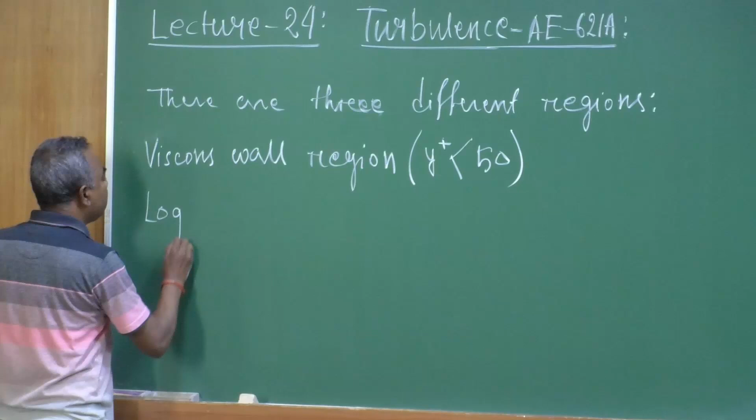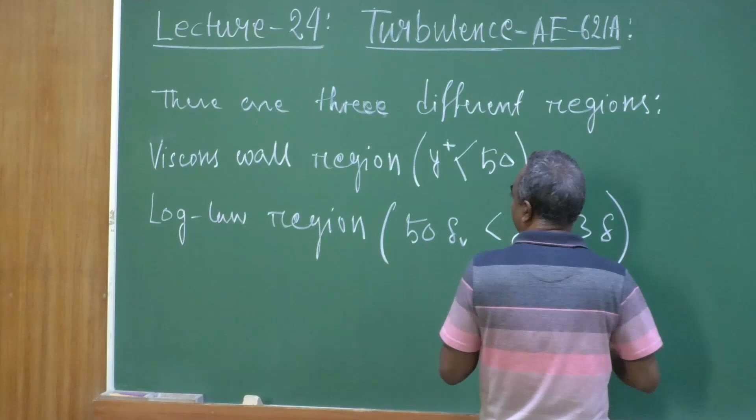Then our log law region, found to be within 50 to 0.3 delta in wall units, where this log law is found to be well valid. That is another regime. The last one is the core regime, or core region, for y greater than 0.3 delta. So that is the 3 regimes.

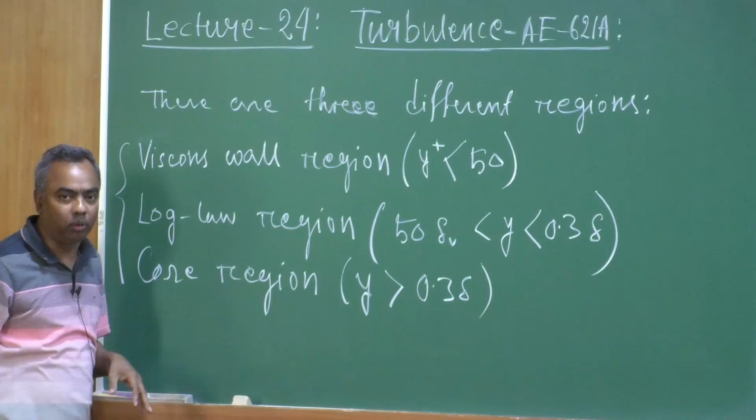In these 3 regimes we will have variations, meaning how these turbulent statistics vary, that is what we are going to talk about now.

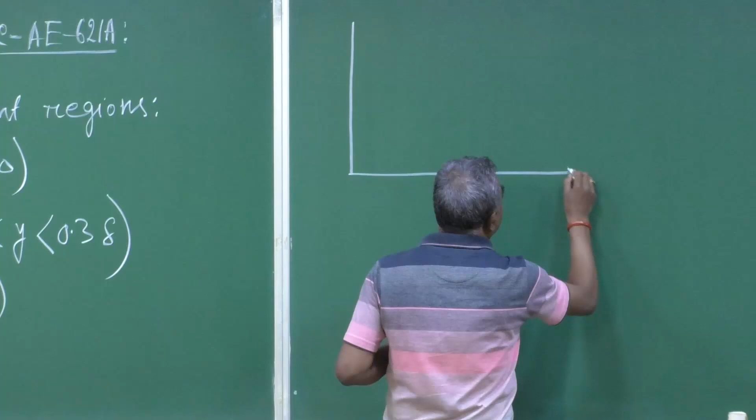Let us see the turbulent statistics plot in turbulent channel flow. These plots, as I mentioned, I will draw mainly following the book by Pope, and for details please go to that book and read for better understanding as well as for the exact values of this variation of turbulent statistics.

Let us say this axis is y, and this scale is ui uj bar by u tau square, that is Reynolds stresses normalized by friction velocity squared. So this is 8, let us say this is 4, this is 7, this is 2, this is 1, this is 0, and this is minus 1.

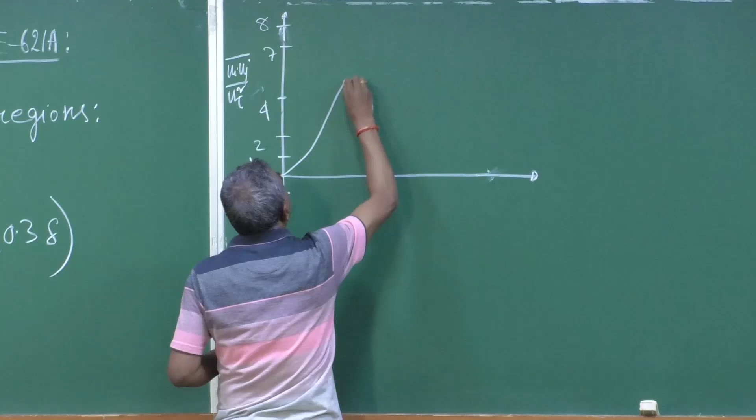Let us see the variation of various Reynolds stresses. For example, Reynolds normal stress u, I am drawing this very close to the wall only, so let us say this axis is y plus.

Till y plus 60, it is sort of blown up in the near wall area. So this is let us say 20 and this is 40 - actually this should be even more blown up because the maxima is somewhere close to 12, so 20 should be somewhere here and this should be 40. We are focusing mainly near the wall here, on how these Reynolds stresses vary.

So this quantity, let me use this color - this one is u RMS squared, that means u square bar. So this is what this quantity represents.

If you see the turbulent kinetic energy, that will also come out something similar - this one is essentially K. K is nothing but half ui ui bar, that is turbulent kinetic energy by definition. So this is what K is.

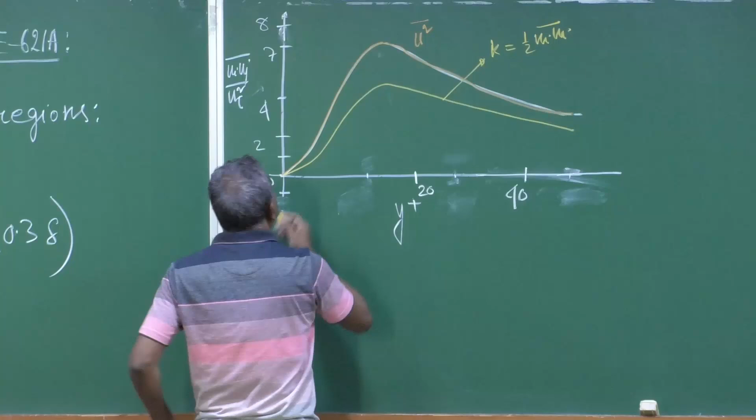Then let us show another 3 quantities, which are W square bar, and V.

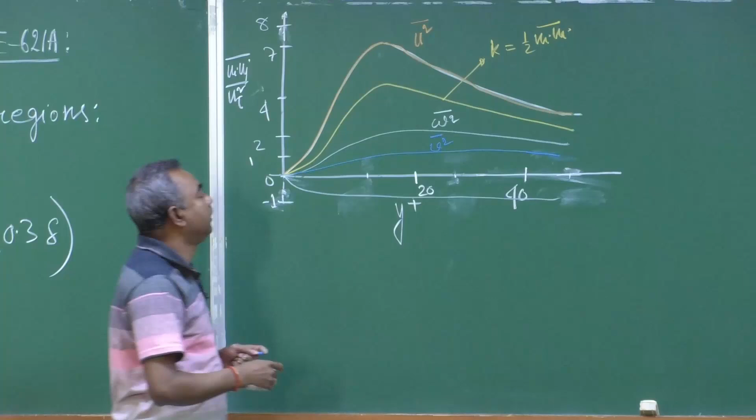So, this is V square bar, okay, and Reynolds stress will vary something like this, so one should be somewhere here. So, that is what your Reynolds stress. Very near the wall you see how these stresses are varying, when this normalization is done by u tau square.

So, this is URMS square, WRMS square, VRMS square, this is what is Reynolds stress. This is UV bar, and this is negative, so that means minus UV is positive, keep it in mind. So, this is the variation of these Reynolds stresses very close to the wall, if you see, they will look like that.

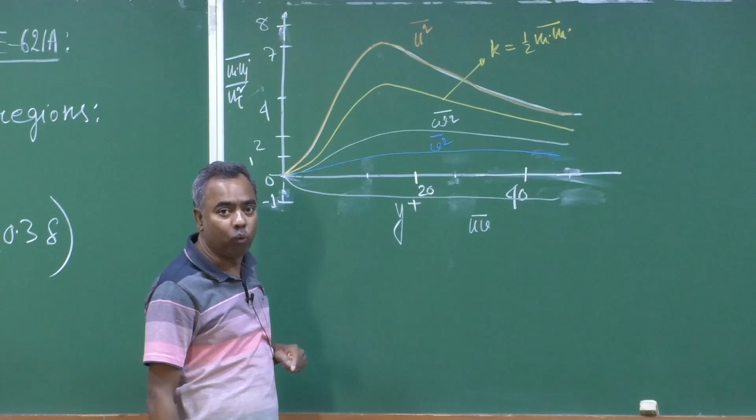Now, let us plot the same thing. Why I have blown it up here is because close to the wall, in the viscous wall region, vigorous turbulence activities are there, because this URMS square is giving a peak here, then similarly WRMS, all the peaks are within y plus less than 50, that is within this viscous wall region. So, the vigorous turbulent activities are going on close to the wall.

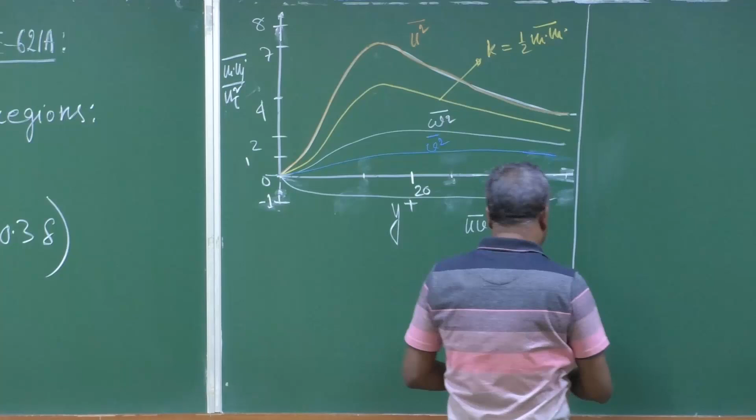All right, now let us draw another plot normalized by the turbulent kinetic energy itself. So, how will it look? Let me draw it here. Similarly, this is y plus, and let us say this is 400, y plus 400. So, that means if this is 100, then this is 200, this is 300.

100, 200 and this is 300, y plus, all right. And this one, let us say it is about 2. And what is this axis? We have normalized this ui uj bar divided by the turbulent kinetic energy equation, divided by this k. And this is let us say 2, this is 1 and this is 0.5. And let us say this is 1 and this is about 1.5.

So, if we now plot this variation, then it will look like this. It will slowly try to come to 0 close to the center line of the channel.

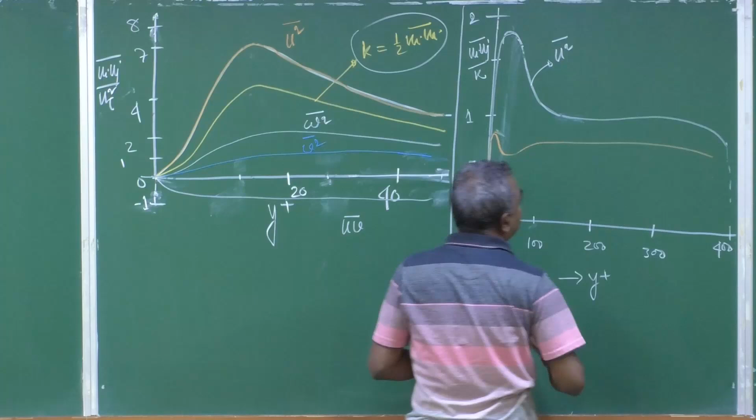This is your W square bar, and your V will be something like this. So, this is your, and if you see, let us say this is minus 0.5, then this Reynolds stress quantity is going to be something like this. So, the main point to show this plot is this particular regime which is the log law regime.

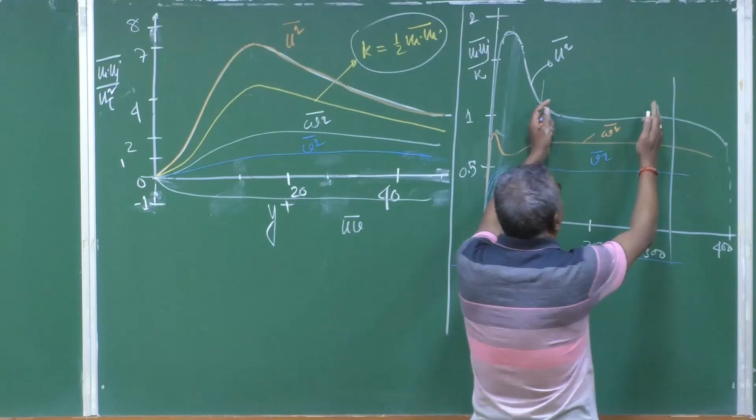So, in this log law regime, these quantities, once normalized by the turbulent kinetic energy equation, are almost self similar, they are uniform in this regime. So, they are approximately self similar in this particular regime, that is what it actually shows. That is the point we would like to make here.

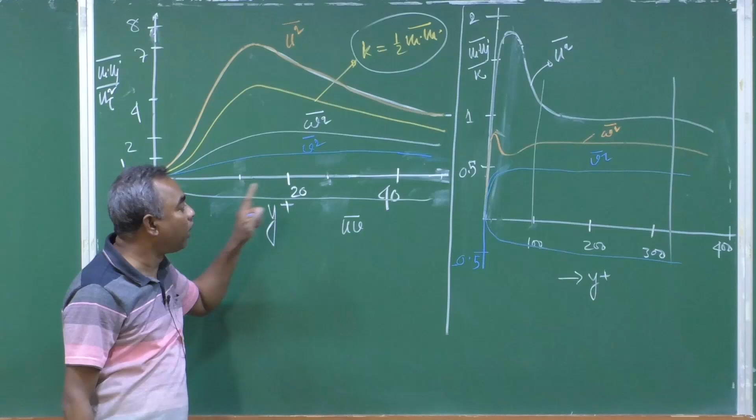The moment you normalize by turbulent kinetic energy equation, whereas in this particular case we see there is a peak value happening close to the wall, which is within the viscous wall region, that is the point. That is the reason we have first divided into 3 regimes: the viscous wall regime, then log law regime, and the core regime.

So, now if we see another plot, let me just plot it here. Note that these are just tentative. If you would like to see the exact plot or values in y and x axis, please go to this book by Pope.

So let us say this axis is 2, 1, 1.5, 0.5, and this is what we are plotting: production P divided by epsilon. So, essentially we are plotting the production term. If we plot the production term, close to the wall it gives a peak, and after that it sort of comes down like this. Similarly, if we plot this, this is production by dissipation.

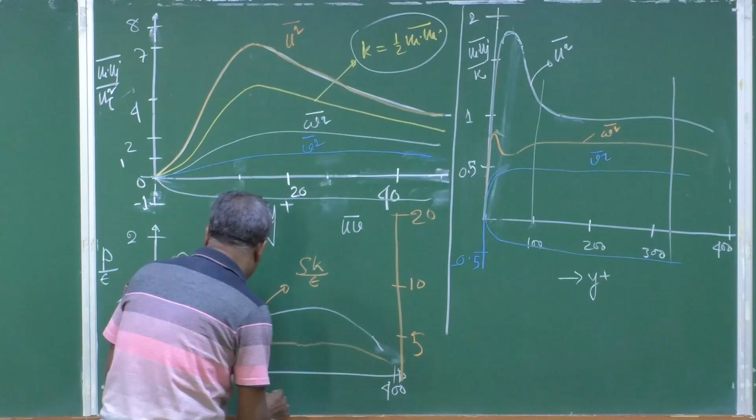And if you plot the shear term, that is also going to come out something similar. But for shear the scale is different, keep that in mind. So this should be 5, and this should be about 20, this should be 10. This is essentially S k by epsilon, where S is du/dy for this case, k is the turbulent kinetic energy, and epsilon is the dissipation.

So you see, very close to the wall, within y plus 50, the production is very high. Later on, in the logarithmic regime, they are sort of constant, and it is kind of close to 1, meaning production is almost equal to dissipation, indicating that transport is negligible in this particular area. Anyway, we will know better as we talk about this.

Turbulent kinetic energy budget: from this we see how these Reynolds stresses vary with respect to y, this being y plus once again. Now, from the boundary condition at the wall we can get some idea about this variation with respect to y. Using the boundary condition at the wall we can somewhat guess the variation with respect to y. How we can do that, let us see.

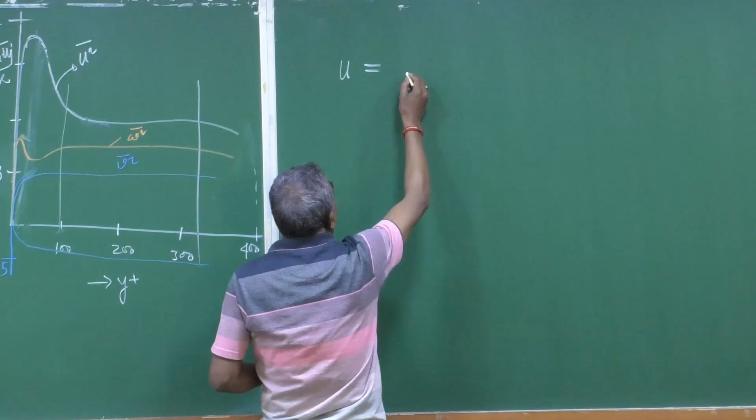At y equal to 0, our velocity is 0. This is the main boundary condition, and using this let us see how we can get this variation. So let us consider the fluctuation u and express this in terms of a Taylor series: a1 plus b1 y plus c1 y squared plus higher order terms. Similarly we can express v as a2 plus b2 y plus c2 y squared plus higher order terms, and w as a3 plus b3 y plus c3 y squared plus higher order terms.

So we can get this variation; very close to the wall, when y is very small, we can express u, v, w by this Taylor series. And A1, B1, C1, A2, B2, C2, A3, B3, C3 are all coefficients.

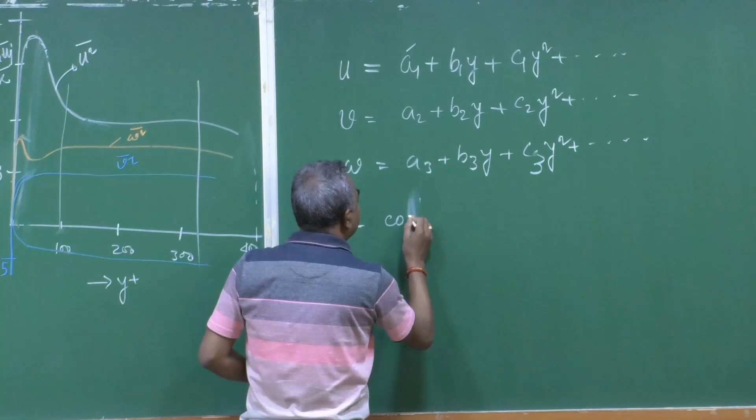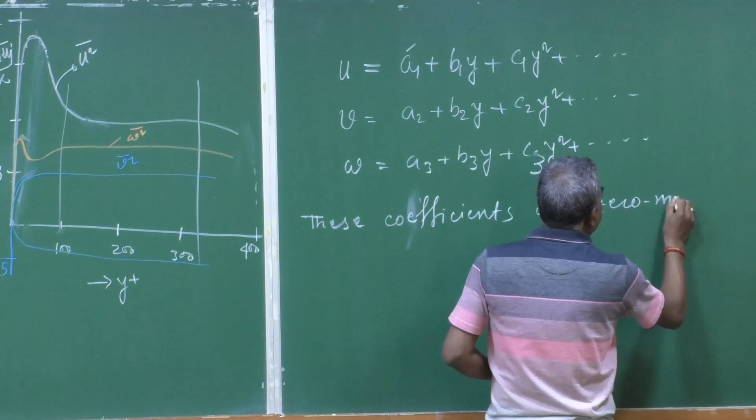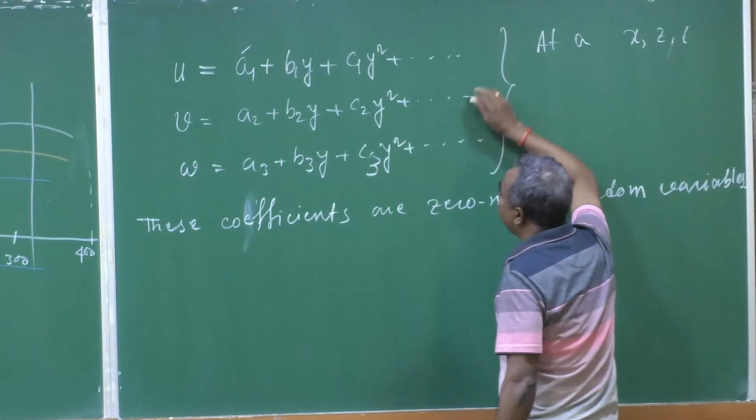These coefficients, namely A1, B1, C1, A2, B2, C2, A3, B3, C3 and all other terms, are 0 mean random variables. This Taylor series expansion has been done at a particular x, z location and at a particular time t. It also needs to be mentioned that these coefficients vary with x, z, and t.

Now we will apply the boundary condition at y equal to 0. At y equal to 0, U is equal to 0, W is equal to 0, and similarly V is also 0 from the no-penetration condition. Let us call these equation 1, equation 2, and equation 3. So at y equal to 0, U equal to 0 implies 0 equals A1, or A1 is equal to 0, because at y equal to 0, U is also 0, so A1 should be 0. So from equation 1, that is what we get.

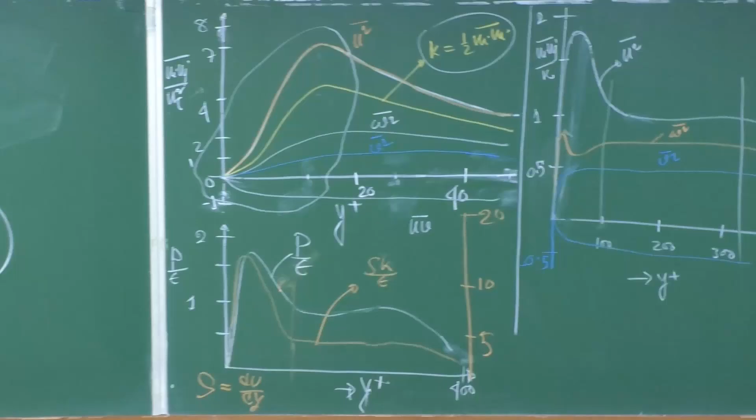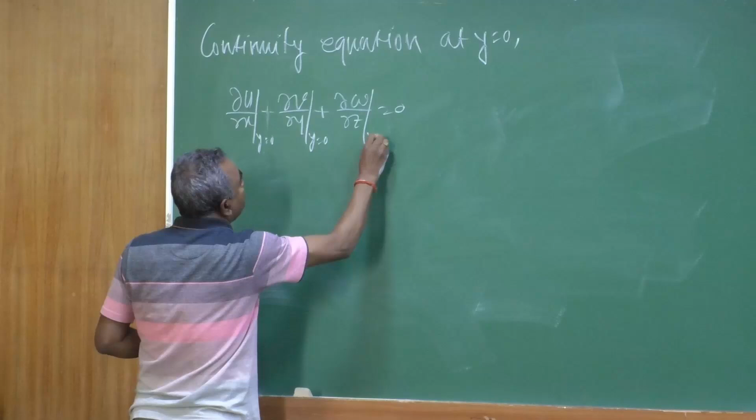Del u del x plus del v del y plus del w del z is equal to 0 — that is our general continuity equation. So at y is equal to 0, this should be considered at y is equal to 0, this also should be considered at y is equal to 0. That is what we should consider.

Now, the flow we are considering is a channel flow, and we are considering fully developed channel flow, which is homogeneous in x as well as in z. That means del u del x at y is equal to 0 is basically 0, because there is no variation of any statistics for a homogeneous flow in this streamwise direction. So from this condition we can say that del u del x at y equal to 0 is equal to 0, and this quantity at y equal to 0 is also 0.

This says that del v del y at y is equal to 0 is equal to 0. That means if we integrate very close to the wall, v close to the wall looks like to be constant. Very close to the wall v is sort of constant, but the value of that constant at y equal to 0 is 0, since v is equal to 0 there, so the value of the constant comes out to be 0.

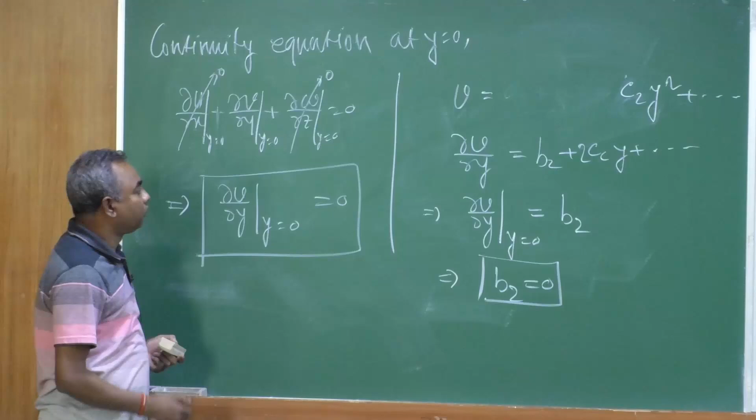So very close to the wall, this is the way the velocities will vary, applying this boundary condition at the wall. Now, b2 is equal to 0 means the way v will behave — very close to the wall v is 0 at this point, and a little bit above v is also 0, because the gradient of v with respect to y close to the wall is 0. That is the reason we are saying very close to the wall.

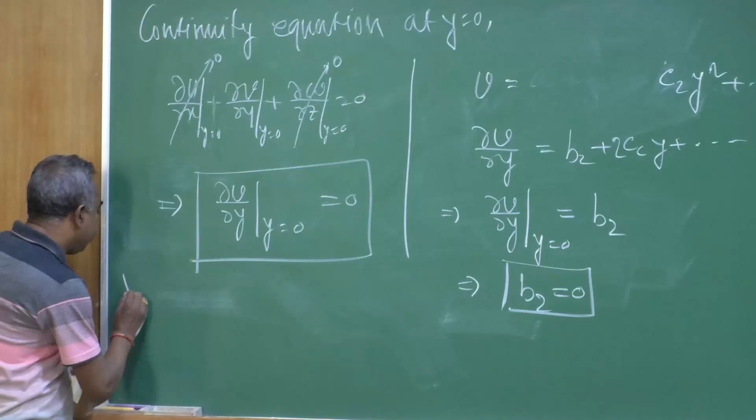So the point we would like to make is: very close to the wall, the flow is a two component flow.

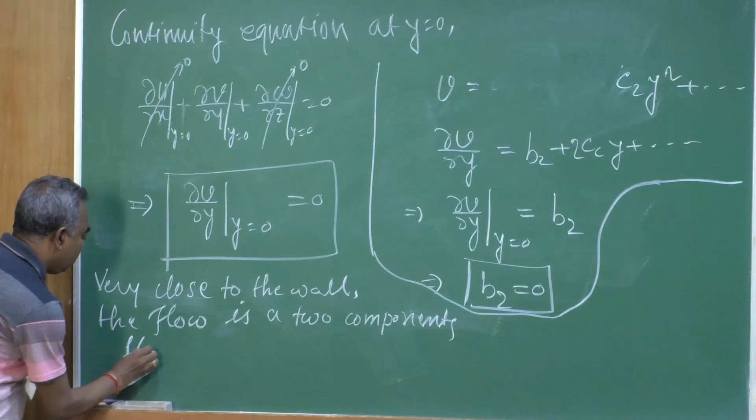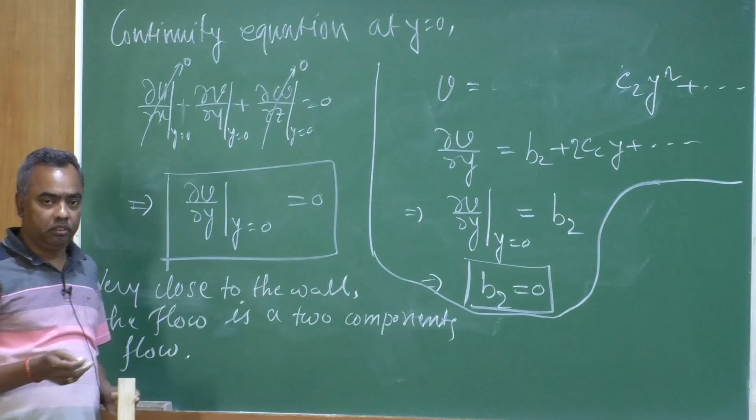We cannot say it is actually two dimensional flow, because here u and w vary in x and z, but very close to the wall, they also vary in y. So we cannot say it is basically two dimensional flow, because u, w can be functions of both x, z, and y very close to the wall. That is the reason we are saying this flow is a two component flow very close to the wall.

All right, if this is the case, let us see what we get from equations 4, 5, 6. So from equation 4 to 6 we can write...

We can write u square bar equals b1 square bar y square, plus all other terms. Similarly, v square bar can be written as C2 square bar y to the power 4, plus higher order terms. Then w square bar can be written as b3 square bar y square plus higher order terms.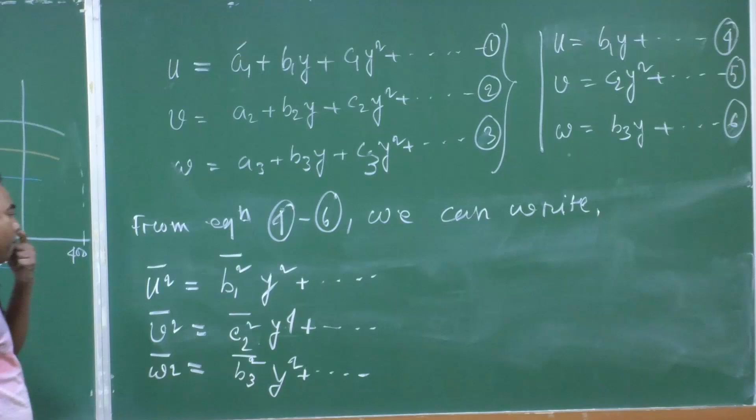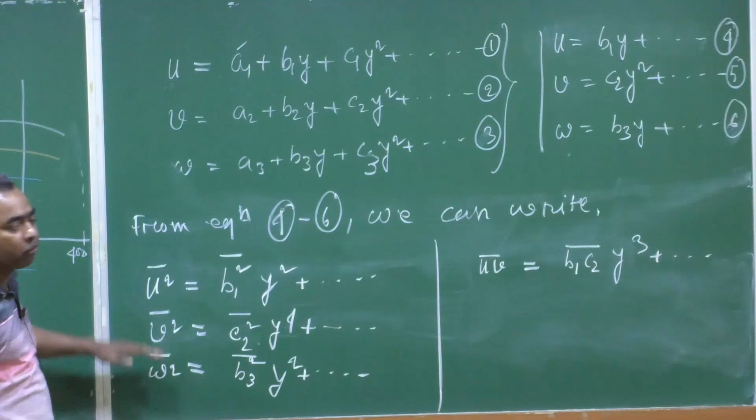And we can also write that uv bar is going to be b1 c2 bar y cube plus higher order terms. So that means the Reynolds stresses very close to the wall will vary as per these equations. Let us label these as equation 7, equation 8, equation 9, and equation 10. These equations tell us how the Reynolds stresses should vary close to the wall.

Now, the point is that y is very small, less than 1. If it is very small, that means the way u RMS square, V RMS square, and W RMS square are changing, the V RMS square will grow even more slowly. The V RMS square growth as well as the Reynolds stress growth close to the wall with respect to y will be slower compared to the growth of u RMS square and W RMS square, for y very small. This is what these equations are showing.

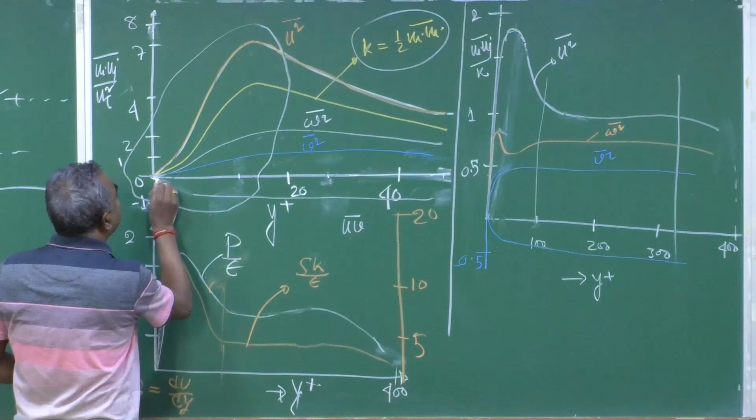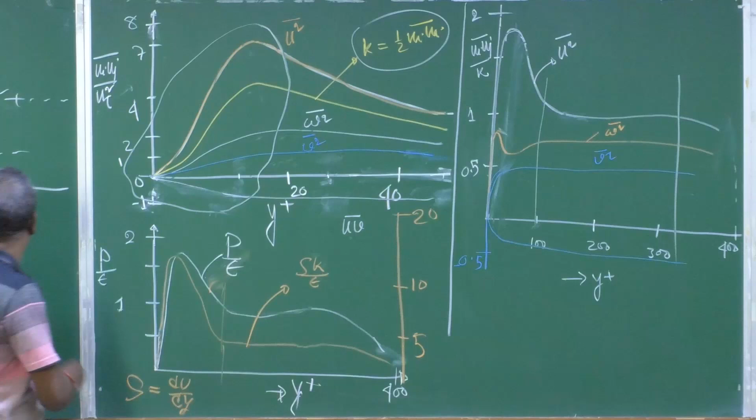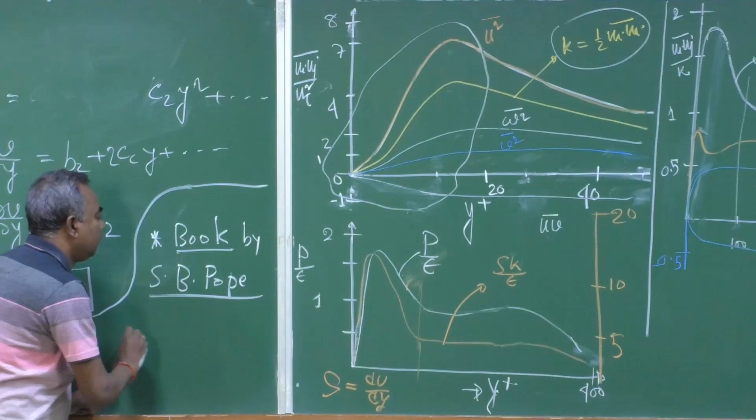I'm sorry, the exact drawing is available in the book by Pope, Turbulent Flows by Pope. Please note this, the book by S.B. Pope, and the name of that book is Turbulent Flows. I have already mentioned this in the first course handout. Please read this book, chapter 7, where all these details are available. Not only that, also do all the exercises available in this particular book.

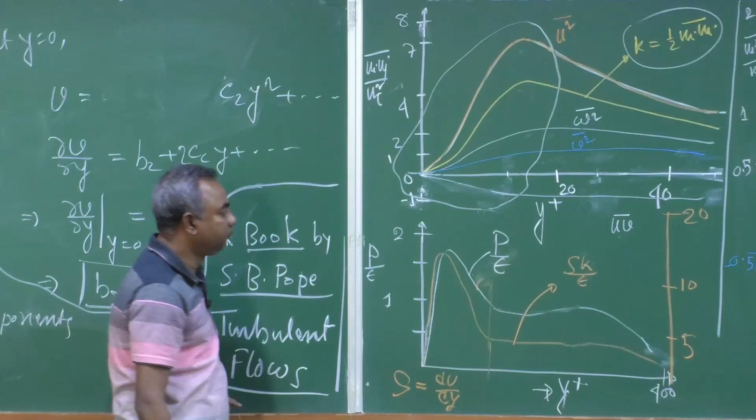Anyway, this Reynolds stress variation essentially we can predict from this Taylor series expansion very close to the wall. Here, one thing we need to keep in mind is that the value of y is very small. That is the point we would like to make here.

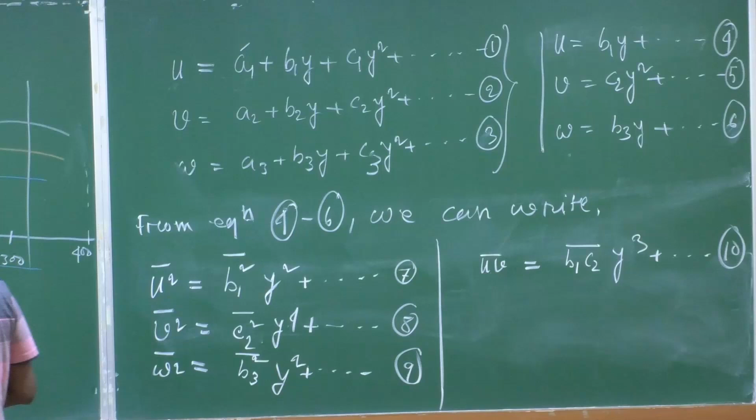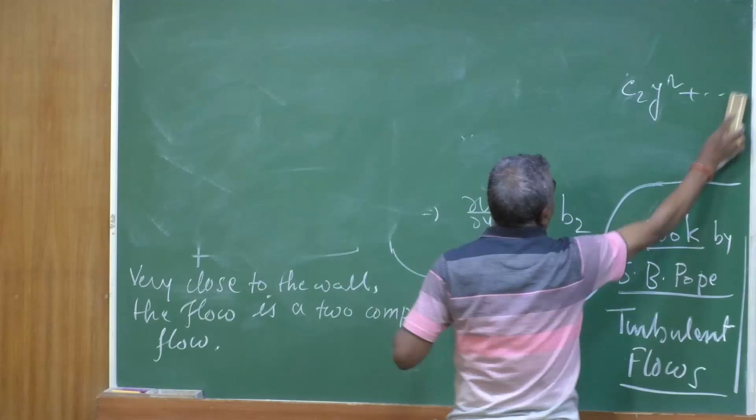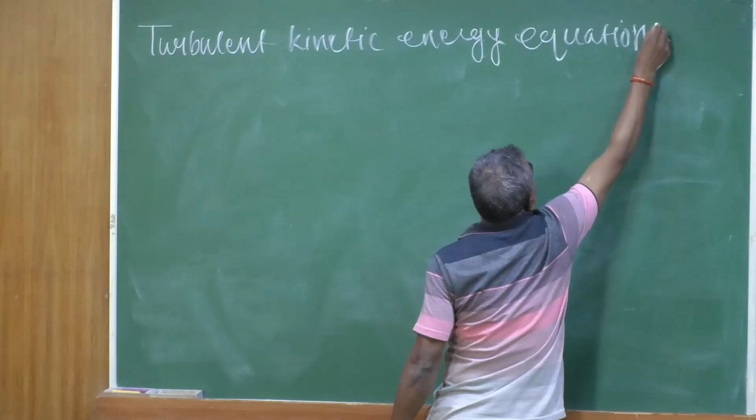Now, let us consider the turbulent kinetic energy equation for this turbulent channel flow. Let us first consider the turbulent kinetic energy equation which we derived earlier. We will start with that particular equation. If we can remember, this is what our equation was.

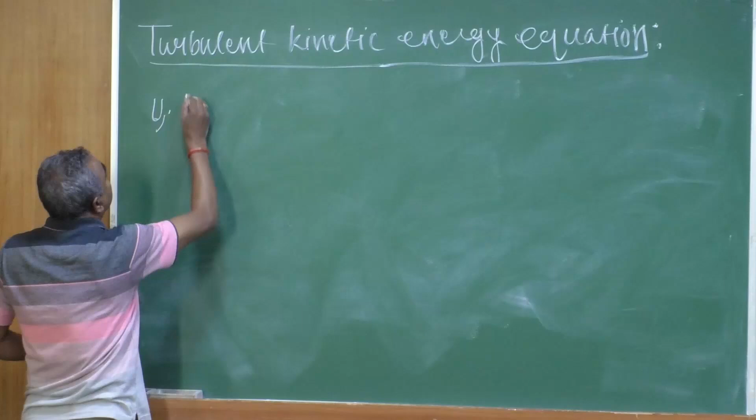ui bar, del xj equals del xj... this was minus p uj bar over rho, plus twice nu ui small sij bar, minus half ui ui uj bar. This is the transport term, right, pressure transport, viscous transport, and turbulent transport, minus ui uj bar capital Sij, minus twice nu small sij, which is the dissipation. So this equation needs to be simplified for the case of turbulent channel flow.

If you do that for the turbulent channel flow, u1, u2, so only one component of velocity. If you go ahead with this, let me do it.

This particular quantity can be called k, as we already mentioned. So, uj del k del xj equals, let us consider these two terms separately del xj. This is our p uj bar by rho, which is pressure transport, plus let us consider turbulent transport, these two terms separately, then minus ui uj bar.

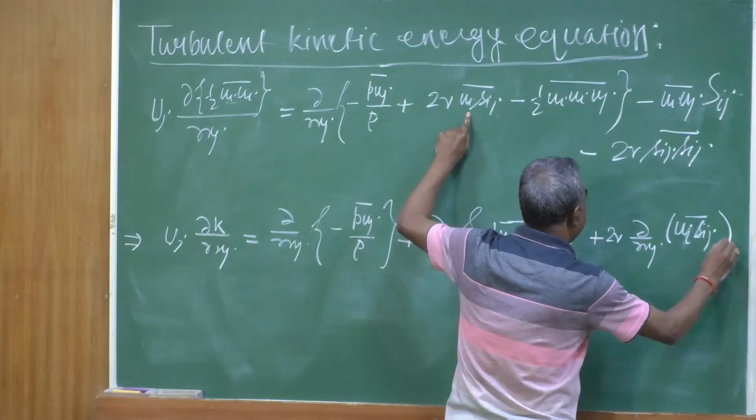This is the transport term, plus viscous transport, let us write it separately, twice nu and del xj, and inside it is going to be ui small sij bar. So, we have kept separately this particular quantity and this quantity.

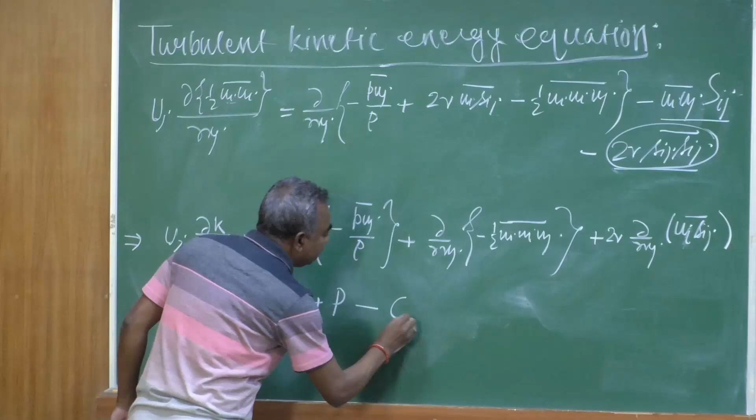This we know as production, so let us call that term production plus P, minus this particular term we know as dissipation, let us call it dissipation epsilon. So this equation can be put in this fashion.

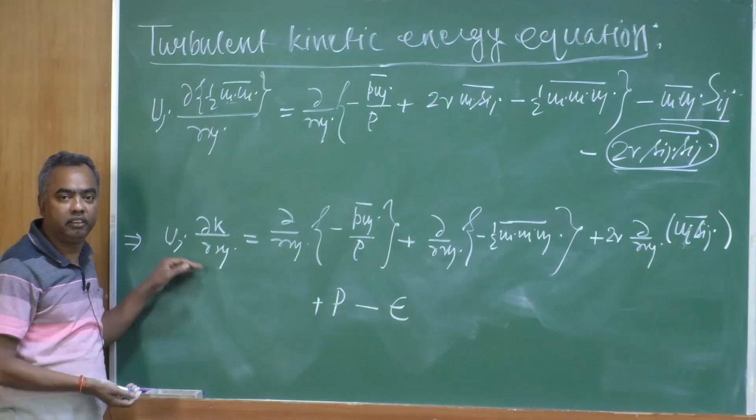Now you see this particular part is going to be 0, for turbulent channel flow the left hand side is 0. Before I rub it out, I wanted to mention one point: turbulent production is going to be high where the shear is also high, as we discussed for boundary free shear flows. So this is also the case here.

So we can write left hand side equal to 0, then production, then dissipation plus let us keep this term twice nu, del xj, ui small sij bar, plus the

plus let us write this turbulent transport, that is going to be del xj half ui ui uj bar, plus pressure transport, so P uj bar by rho should be there, minus should be there.

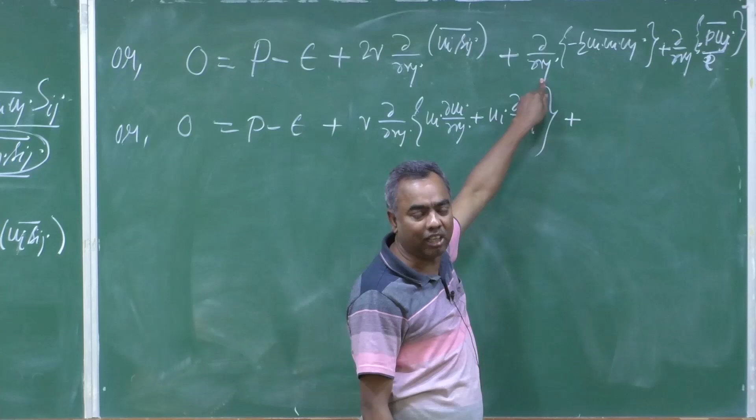So this particular term for the case of turbulent channel flow, only one gradient with respect to x2, meaning with respect to y, is going to survive, all other summation for j is going to go out. That means this particular term we can write as del y, minus half ui ui v, because j equal to 2 only is going to survive. That is what we are going to have for this term.

So this is our turbulent transport term. And similarly, the last term, only that j term is going to be del x2, the statistics only survive for the gradient in the y direction, j equal to 2 direction, not for 1 and not for 3. So here we are going to get del x2 meaning y, this minus p v bar, 1 by rho you can take it out, or keep it there for the time being.

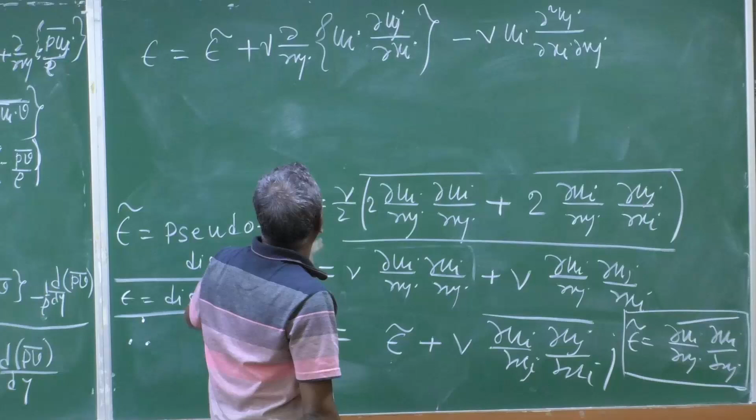Okay, and this ui, we can write this ui, del uj del xi. If we write that, nu should be there. If you write that, then what do you see? We are getting this term plus another term we are going to get, so that needs to be subtracted, minus nu. So another term what we are going to get: nu ui del, del 2 uj, del 2 uj del xi del xj. Okay, that is what we are getting then, and should be bar of course.

Let us see what we get. So you can take this term inside, and this particular term, how we can write it once again: ui is coming out. So this particular term, then epsilon tilde plus this term is nothing but, this ui can be taken inside. So this can essentially be written as del 2 ui uj bar del xj, this term. Minus, this you can write as ui, del xi, you take it out, then this can be written as del uj del xj, which is 0 from continuity.

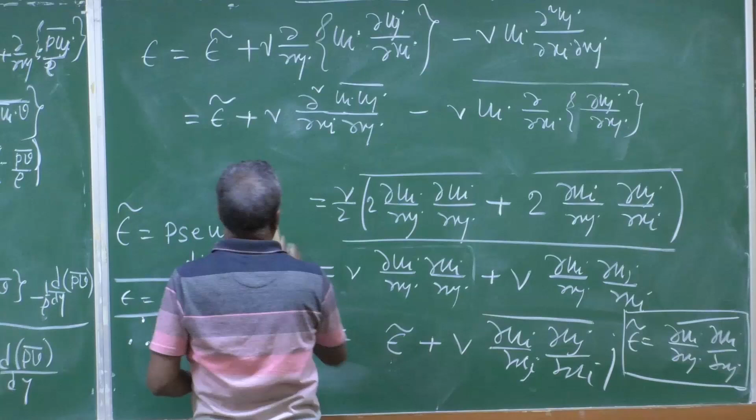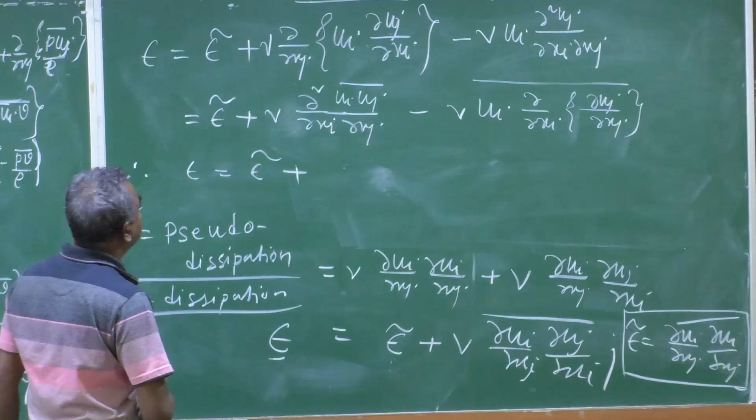So that means, so what it says: epsilon equals to epsilon tilde plus... epsilon is equal to epsilon tilde plus this nu del 2 ui uj bar del xi del xj, right. So let us come back here. That means this epsilon we can replace with this quantity.

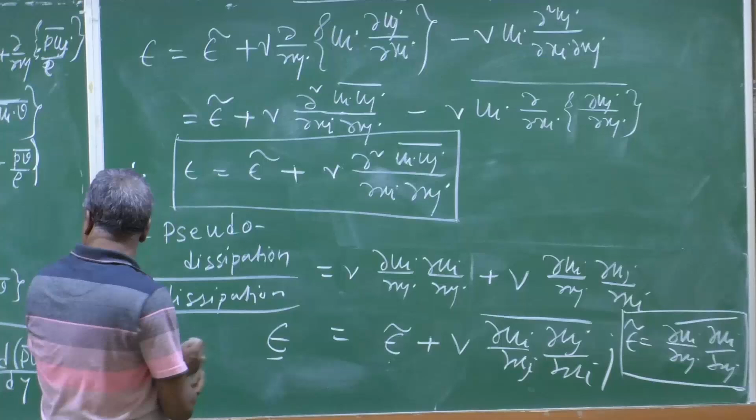So this epsilon, the dissipation, can be replaced. So in this particular equation, this particular term can be replaced with minus epsilon tilde minus nu this particular term, which will get cancelled out. So let us do another line here. So if we continue with this equation, we can write: production minus epsilon. So minus epsilon is equal to pseudo dissipation minus nu into del 2 ui uj bar del xi del xj. What else are there?

Plus this term, d2 k dy2, plus del 2 ui uj bar del xi del xj, plus d dy, turbulent transport, minus half ui v, minus 1 by rho d p v bar dy, the pressure transport term. So this is what is our equation, and this term and this term get cancelled.

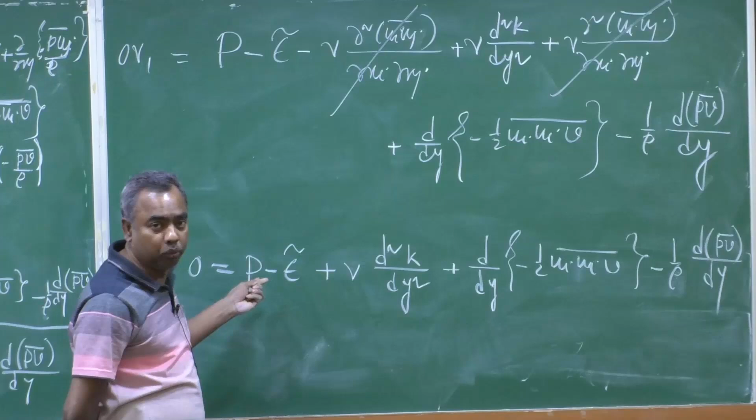So this particular term is known as viscous diffusion, keep it in mind. This term is propping up from the viscous transport term itself, it is coming from the viscous transport term. So anyway, now if we plot this, or budget this, for turbulent channel flow, what do we get?

Forty, 30, 20, 10 - this is our y plus axis, and this one is our normalized turbulent kinetic energy. This positive part is known as gain and negative part is known as loss. This is 0, let us say this is minus 0.2, this is about 0.1 minus, this is 0.1 plus, let it stick somewhere here, and this is what is your 0.2, for example.

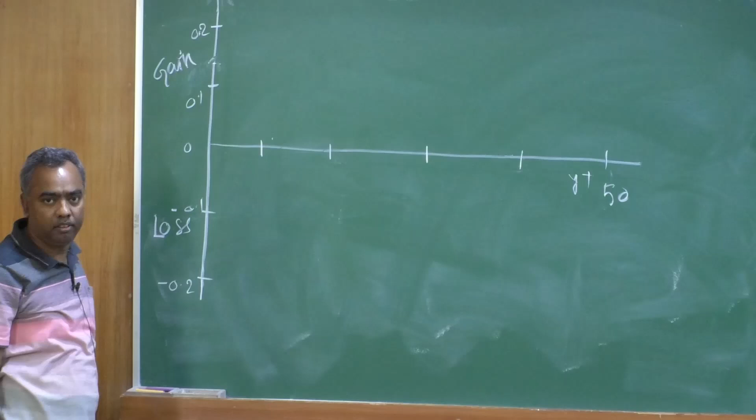So these are some tentative numbers, these numbers can change a little bit. The point is how this production term behaves - what is the production term? While drawing we have to also keep our physical argument alive. So u v du dy, that is our production term. u v is going to be 0 at the wall, so production at the wall is anyway going to be 0.

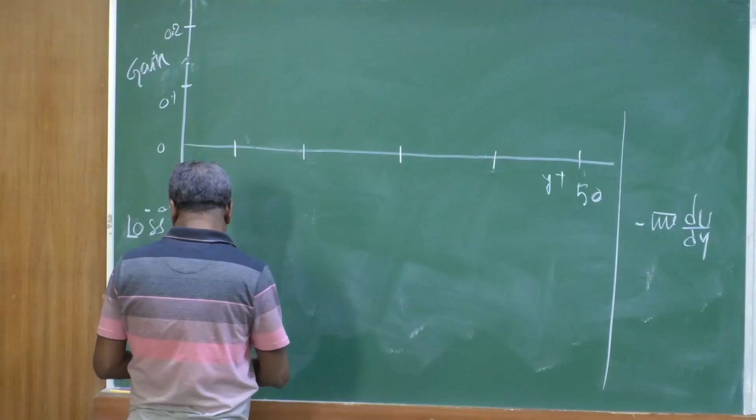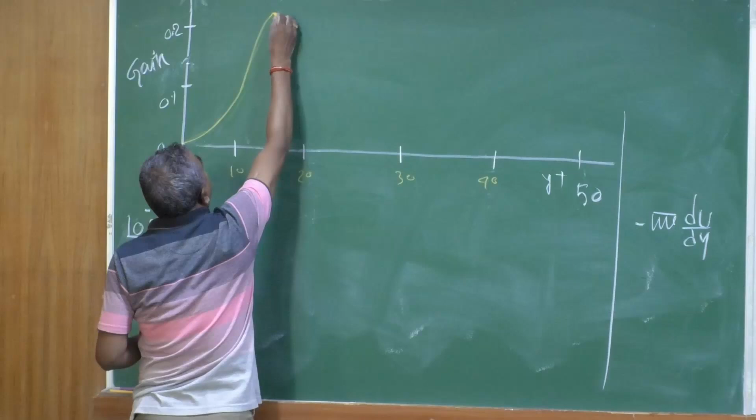So production is slowly going to increase, and it is going to be maximum where your shear is maximum - that is where tentatively your production is going to be maximum. So if we draw the production term: this is your 20, this is 10, this is 30, this is 40 - this is important to note. So production term if we draw, this is going to be even steeper. The peak will be somewhere at y plus 12. Production peak is seen to be there somewhere near y plus 12. So this is what is our production, P is going to vary like this.

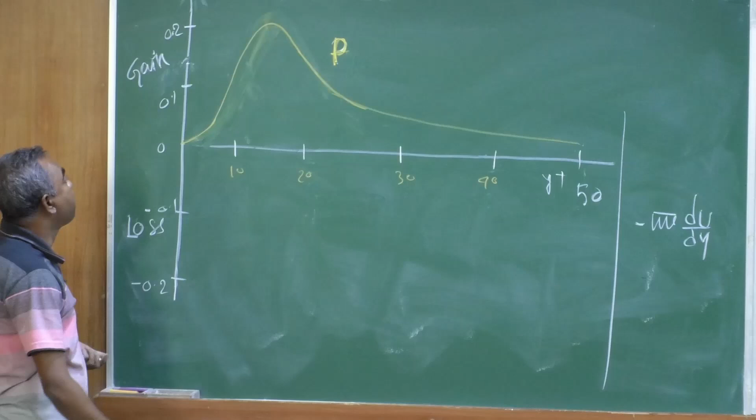At different y locations, production P is going to vary as this curve.

Now if you see your dissipation, which will show something like this. So your dissipation term D, that pseudo dissipation as per this equation, is going to vary like this. So if you see here near this peak production,

your production is in excess of dissipation, that means the left out turbulent energy is going to be transported away from that particular point. That needs to be kept in mind. Wherever production is not matching dissipation, that particular amount of left out energy is going to be transported away. So this is what is your production term.

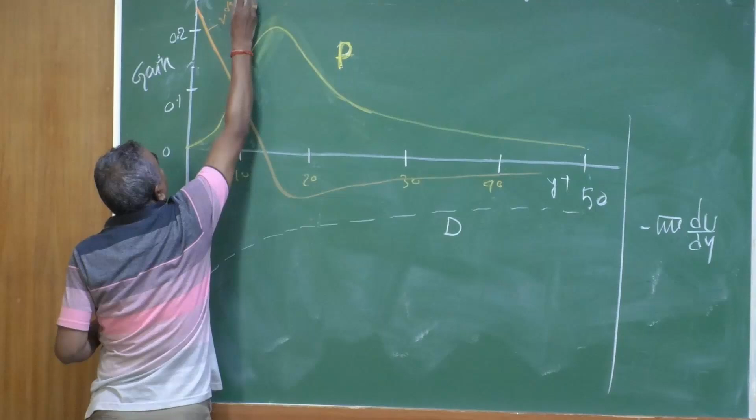Now if we consider your viscous diffusion term, that is going to vary. Let me use another color. This viscous diffusion term will vary something like this. This is what the variation of viscous diffusion looks like. Viscous diffusion means this particular term, nu d2 k dy2. This term will vary like this with respect to y.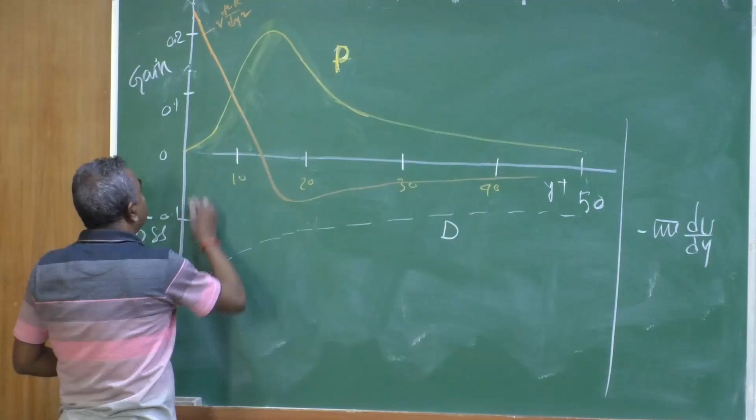And if you consider your pressure transport, it is going to be negligible, something like this. Pressure transport is minus d by dy of 1 by rho times p v bar. This is the term. So this is the dissipation we have mentioned, let us say this is it.

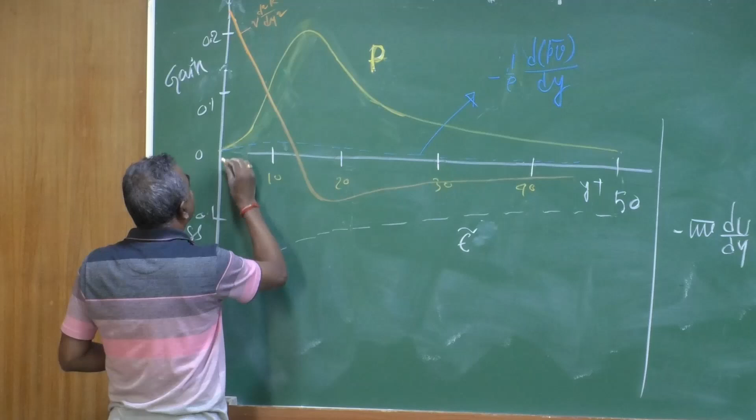We are now left with only one term, that is your turbulent transport. Let us use some other color. Turbulent transport is going to be something like this. For the exact variation, please go to this book and figure it out. So turbulent transport is going to vary as this. This is what is your turbulent transport, that is d dy

minus half ui ui v, this particular quantity. Yes, this is what is going to vary like this. So the point here is that

the viscous transport is actually maximum at the wall, and at the wall you see your turbulent transport, turbulent production, and pressure transport all are going to be 0. That means the dissipation at the wall should match.

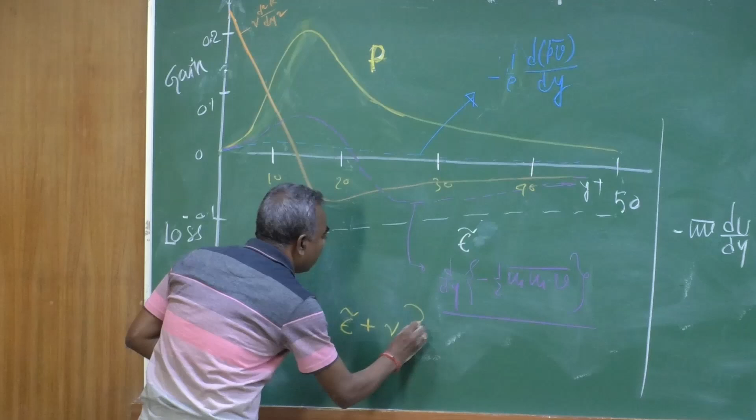So dissipation at the wall - what was the dissipation? This epsilon plus, we got this particular term, del 2 ui uj bar del xi del xj, just now we have derived. So at y equals 0, this quantity is also 0. That means at y equals 0, your epsilon equals epsilon tilde, because this quantity is going to be 0 at the wall.

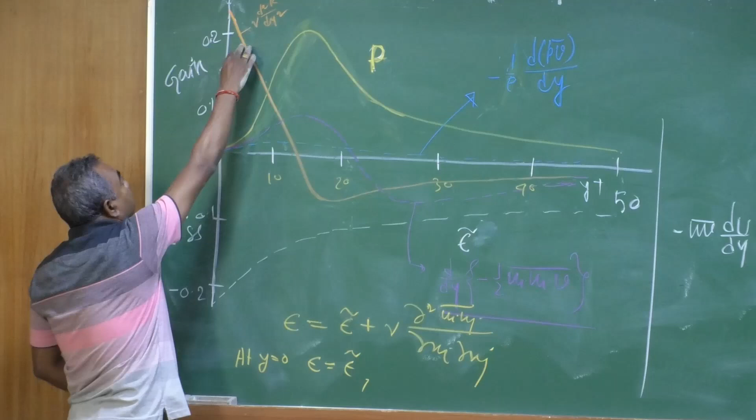So that means the viscous transport, since it is going to be balanced with the dissipation at the wall, since all other quantities are going to be 0. And here your turbulent transport transports kinetic energy both towards the wall as well as towards the log layer, and pressure transport is very negligible. Viscous transport transports energy towards the wall. So this is the turbulent kinetic energy budget for your channel flow.

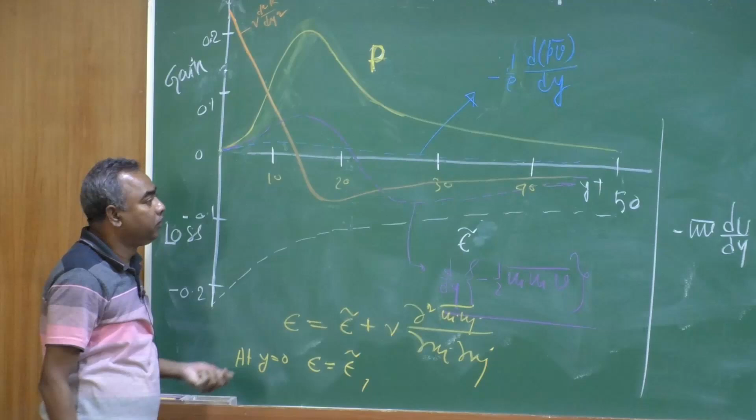This needs to be kept in mind. So this is what I would like to talk about, mainly about this turbulent channel flow. We are not going to extend the discussion much further in the next class. We would like to stop here for turbulent channel flow.

Only one point before I close, I want to mention that the Reynolds number dependency we have not talked about. Whatever we have drawn in the case of Reynolds stresses, variation of Reynolds stresses with respect to y - how does it vary for different Reynolds numbers? It has been observed that those Reynolds stresses are mildly dependent on Reynolds number, based on various experiments at various Reynolds numbers.

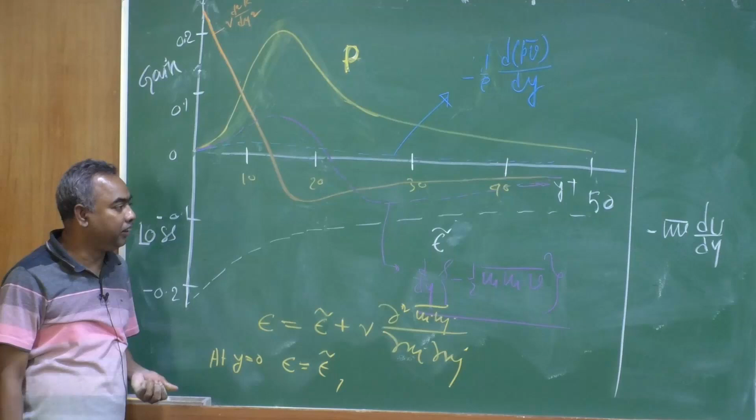So anyway, I just wanted to mention, please go through chapter 7 of the book by Pope. Whatever has been discussed in the last couple of lectures is available in that particular book, and do all these exercises to understand better about this flow or about the turbulent channel flow. Anyway, I would like to stop here. We will meet again in the next class and talk about pipe flow as well as boundary layer flow. Thank you.